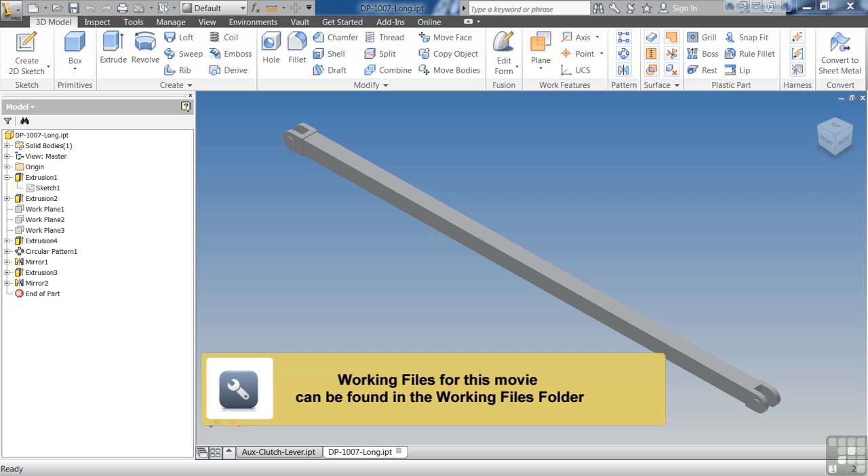So I'm going to come up and say create a new drawing. I'm going to click base view, and click my part here. But I'm going to give it a pretty long distance here, 1 to 1's fine there. Right click and OK. You can see it's sticking off my page, but it's such a long skinny part,

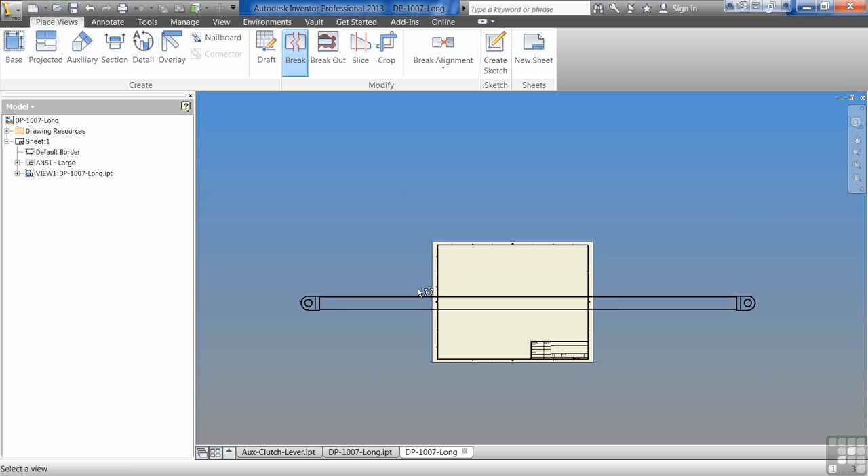I don't necessarily need it to be scaled way down. So what I can do is come up here and click break, click the view, and you notice it gives me a couple options. Do I want to do like a structural style or a rectangular style break? You can adjust the teeth, how you want them to show up, how jagged you want them to be.

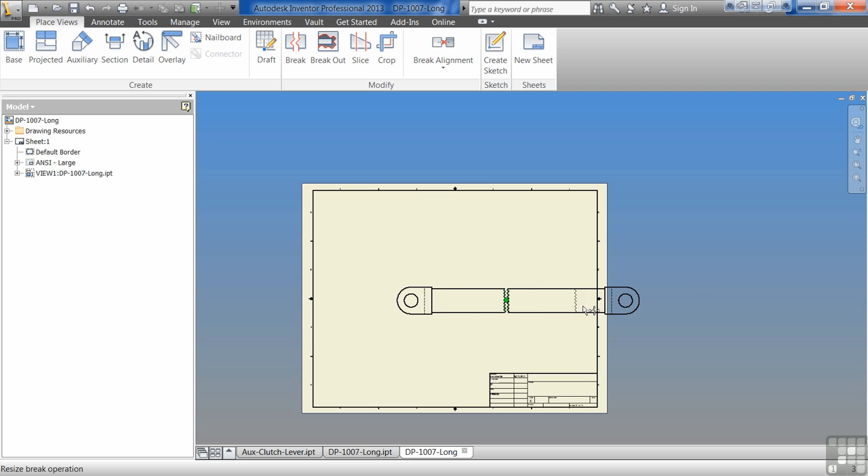So I'm going to pick 2 points, and you can see there it gives me the break. Now you'll notice that I'm still off my page here. So what I can do is grab one side of the break and drag it towards the end. As I do that, that shortens my part more and more till it'll fit on my page.

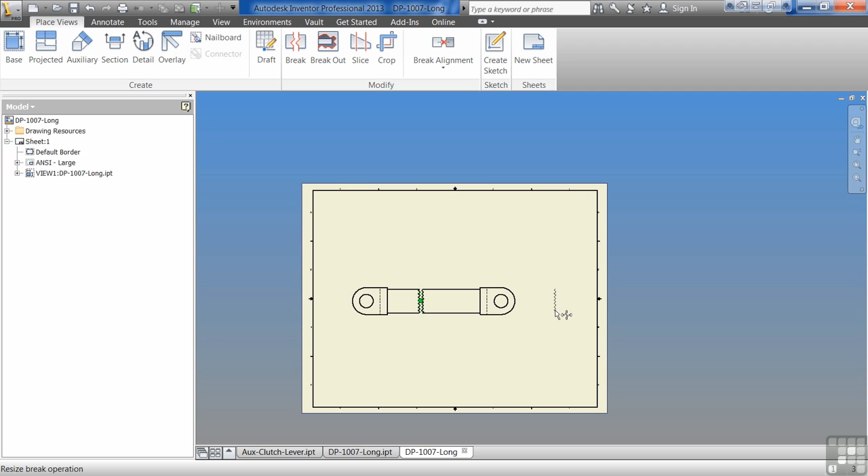Likewise, if I decide I've got it too short, I can drag it towards the other side. So if I grab this side of the break here and drag it to the right, it'll make the part smaller. If I grab this side, it'll go this way, make it smaller. But if I grab the left side and drag it to the right, it'll make it longer. Same with the right side to the left. So you can kind of decide, hey, where do I want my break to show up at? How long do I need it to be?

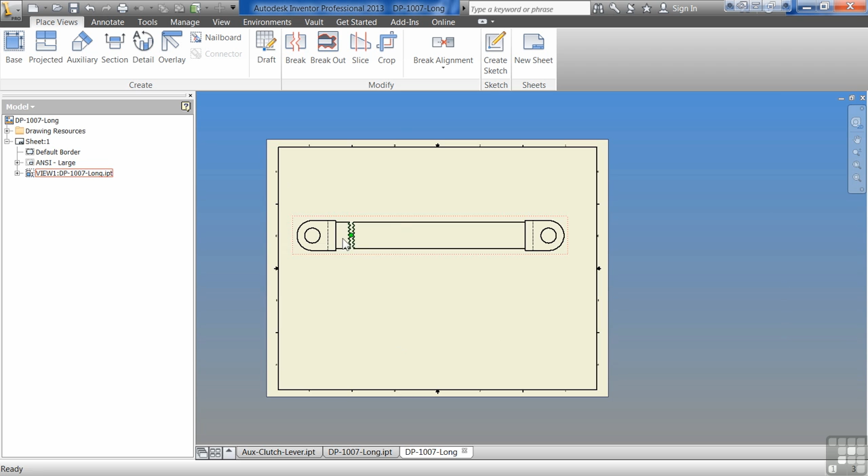And you can get it just the way you want it to be and have your part show up on your page. Me, I like to kind of have it down at one end. If I need to adjust the way it looks, right click on it, say edit break. You can change it over to a traditional break symbol.

And that's not nearly big enough. See there, I still don't like that. Edit the break. Make my gap a little bit bigger there so it'll scale up. So I can end up with something that looks like that.

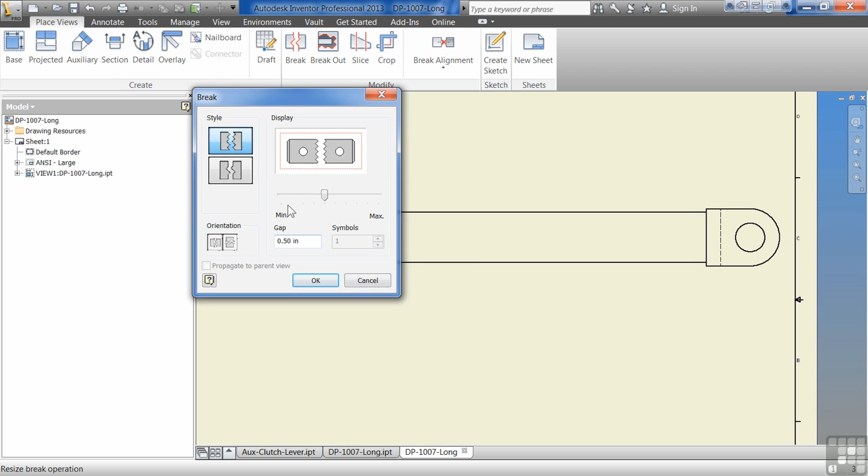Or if you like that broken look, you can end up with a true break looking type thing. If you had a really tall part and you went with the traditional symbol, you could have multiple breaks in there. So if this was like a big giant panel or something that was 8 feet tall and 20 feet long, you could have a couple breaks down through there. You don't have to have just one.

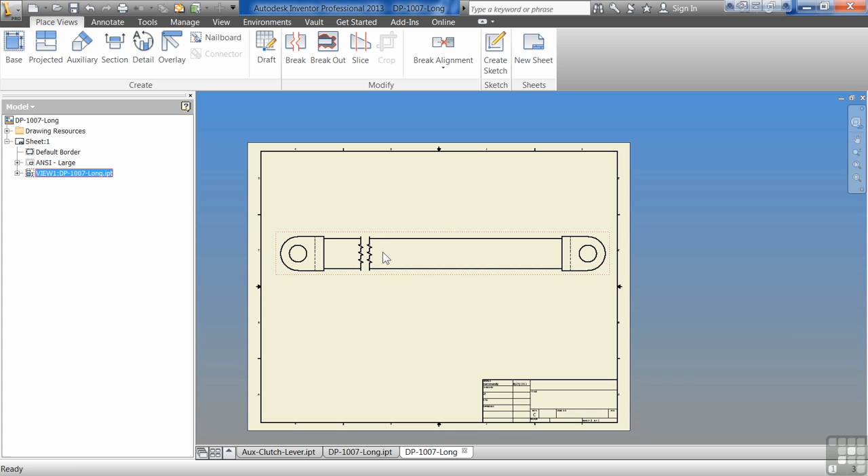But once again, this is a super simple tool, not a whole lot to go into. If you want to play around with it, there will be a file called dp-1007-long. Add that into a drawing and create a break out of it on your own. Remember, you drop it in, you go to the break command, and then you actually play with the break itself to adjust how the break looks.